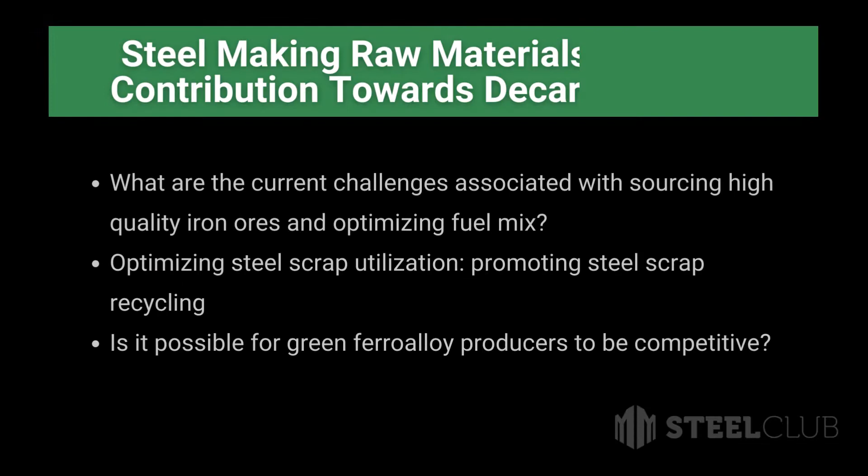So we have a topic here, and the topic is climate change. And next to climate change, there's of course other topics like urbanization, which are, well, good for us being in the value chain of iron and steel because it drives the demand of steel. But on the other hand, we're also further cannibalizing our natural resources, which are there plenty when we talk about iron ore, but probably not in the right quality and grade as we need it.

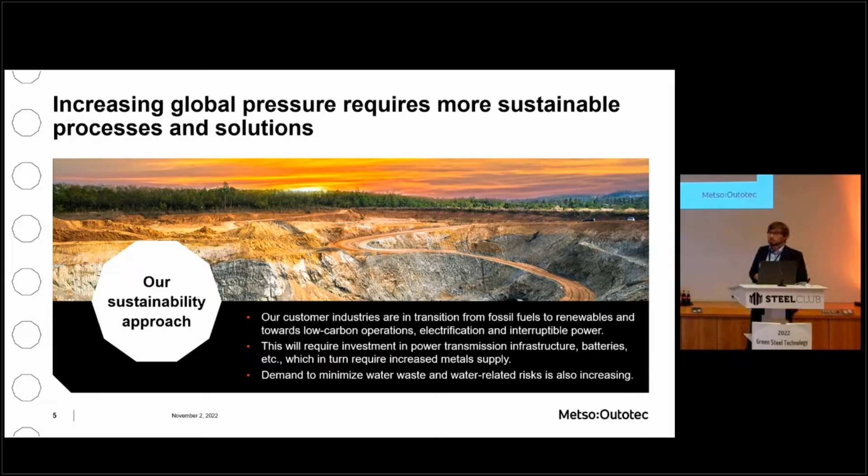So the main question for us as Metso Outotec, we're, as said, busy in the raw material side, from supporting miners with mining equipment, all the way over pelletizing, sintering, direct reduction and smelting. So that's our value chain that we represent. So the main question for us is how can that be sustainable?

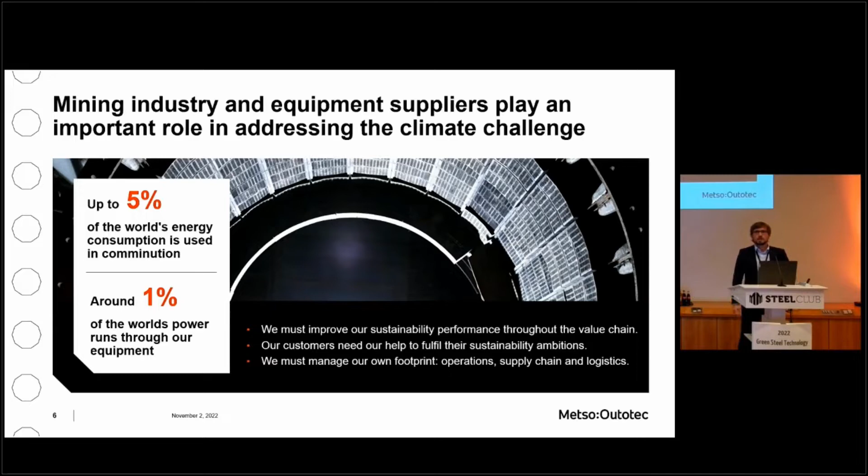When talking about raw material side, we're talking about concentrates, and we're talking about a lot of comminution and grinding. And now the figure here is that 5% of the world's energy consumption is used in grinding mills, and that's a hell of a lot. Those 5% need to come to the grinding mills, and they are usually not placed in the big cities or where you produce the green energy, but they're located in very remote areas. So the power grid challenge is definitely something we will need to be looking into.

Truth be told, as said, I'm German, I can't be fun.

So iron and steel industry, we all know that, but it's the biggest CO2 emitter in the entire metals industry. So it's a community that has realized that. It's a community that is now going for the green steel transition, and that is something, well, that all interests us. That's why we're here today.

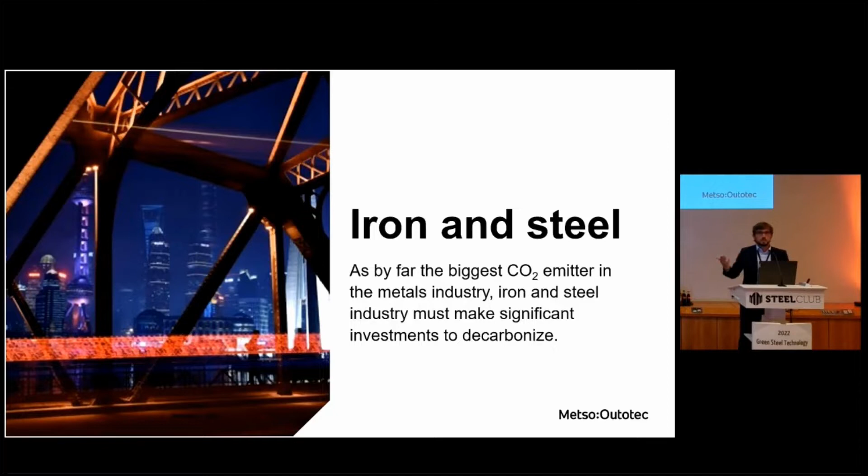So a couple of numbers. How does the industry look today? Well, 2019-20 numbers, and how is it predicted to be in 2050? Now, the good news is, as said, through drivers like urbanization, further growth in the world, the global steel production is predicted to grow over the next decades. Well, that's good news. Bad news is, even with that growth, how do we make the whole steel industry green?

There, what experts are saying, scrap will be playing a more dominant role in secondary steel making. And also here, due to the fact that steel has a very, very long lifetime, about 40 years, the prediction is that, for instance, scrap coming from China, which was produced over the last decades, will only be made available 2030 onwards. And that is where we then see the hike from 400 million ton to 900 million ton availability in 2050. So it'll cover approximately 40–45% possibly of the steel demand that we have.

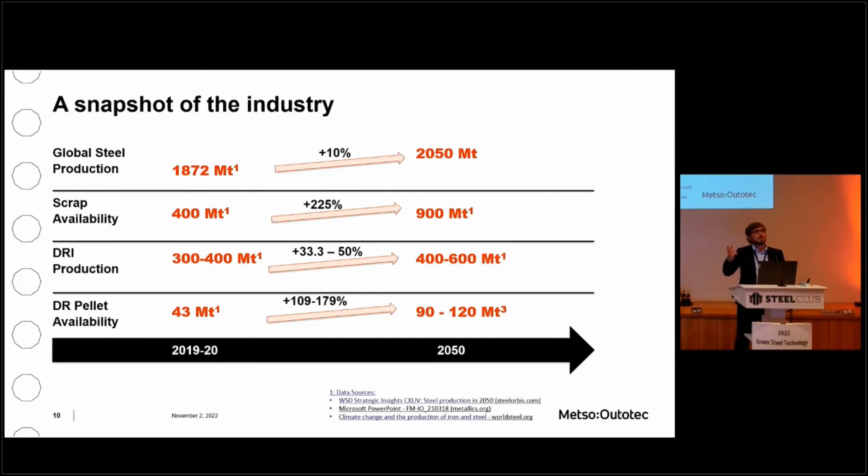What can we do? Obviously we're not helpless. We can do something. So the most important topic from our point of view is to be pragmatic in the first place. And we're not alone with that view. When you look at the World Steel Association, they also have defined that there will be 3 steps. One is to decarbonize whatever you have to the maximum extent possible. So that's a good approach.

Second step is utilize scrap to the maximum extent possible. And we've been talking about more and more scrap becoming available, but it will remain a scarce resource, and the availability will not necessarily be where you then need the new steel, but that's definitely a good approach. And the third step, what they're saying, and this is also depicted here from our point of view, you have to invest into breakthrough technologies.

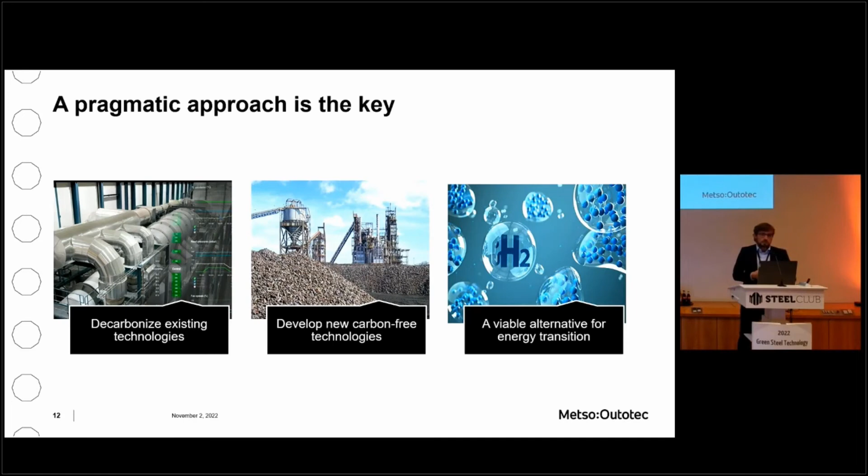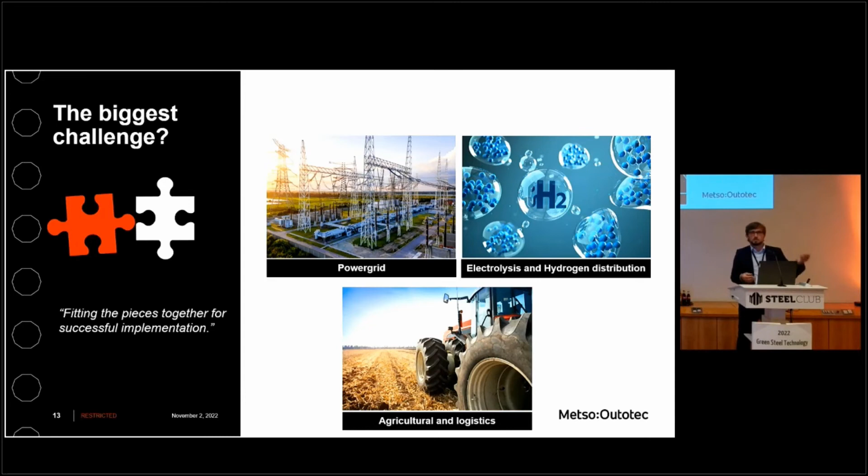And those breakthrough technologies need to be as carbon free as possible from the first place, and that's also in line with what Anuka stated earlier: don't cut the consumption, but make sure that whatever you produce is as green as possible. And thereby hydrogen obviously plays a vital role. So replacing all the energy that we're using, electrical energy, by green electricity imposes huge challenges on the infrastructure. How can we actually transport the green electricity that we're capable to produce to the places where we need it?

Cold bonding has been a topic for many years now, and Vale has supposedly now found a breakthrough. So that's a good sign, because it is a new development, a new technology, and a way forward as well. We are monitoring, of course, and where we see that the technology needs to be tested and tried is: how does it withstand transportation? How does it withstand the charge pressure in the blast furnace, for instance? That remains to be seen.

From our point of view, and that's what I try to focus on, pellets will remain crucial also in future, because they are the proven, well-transportable good. You said it, that shortage was there, and especially when closing down Samarco and Vale production plants, that shortage increased even over the years. Nevertheless, we're seeing in Europe currently about 12 DRI projects emerging. So everyone is thinking that there must be pellets. And as I read it, it is the availability of the concentrates.